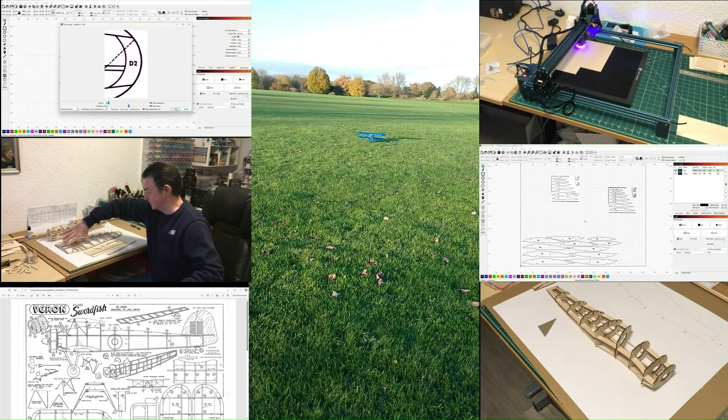Okay, so first of all, if we go to Outerzone, in order to get our plan, in the search I'm going to put DLG. And then when we search, we find there's only one Discus Launch Glider in here. So if we select that, go to the plan details, there's a nice picture of the airplane there and a bit of an overview of the plan.

So what we can do then is, by just clicking on the plan file, we'll download that. It'll go straight into our download, where we can then move it either to our desktop or into whatever folder you're using for this build. Okay, so this is a copy of the plan.

Now this is a modern vector plan, so everything will just work in Lightburn. It'll already be Lightburn friendly. We won't have to do anything with these components.

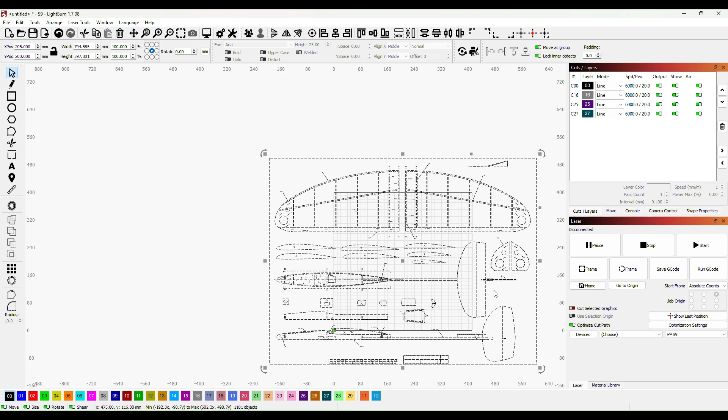So what we'll do is we'll open Lightburn, and then I'll import that file, DLG. This is where I've got it, so double click on that, and now that is imported into Lightburn. So all I'm going to do is move the plan across so it's sat next to my workspace. This is the workspace for the laser, the Sculptfun S9.

Now what you'll notice is that for whatever reason, and I don't know what the reason is, the Lightburn program has not brought the notes with it. So the arrows are there, but if you look at the original plan, you can see there's notes here.

So for example, this here is carbon fibre tube spar. So that means we're going to have to get some carbon fibre tube. And I think also I might look at this leading edge here. It's saying that it's made out of 1/8 dowel, which would be 3.2mm dowel. But I might look at using carbon fibre there, which will mean that I'll have to cut in these wing tips so that we can sink the carbon fibre tube in without having to taper the end. So we'll have a look at that when we come to assembly and see how we get on with that.

Now, if we go to Lightburn, what we find is these components, they're already made up as vector files, so we'll be able to use them as drawings that are ready to cut. The problem that I've got with them though is, obviously we need to remove this trailing edge from these ribs.

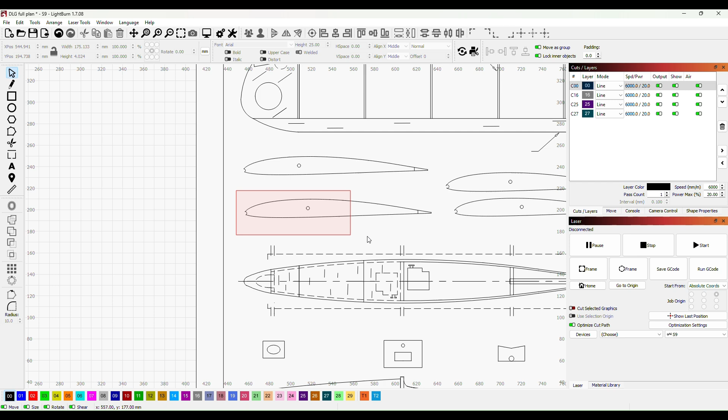But if I take hold of a piece of this rib and move it, you see that it's made up out of small bits of line and such. So what I'm going to do is just Control Z, Control Z to get all them back to where they were.

What I'll do is, I think the best way for us to go about this is to bring that across, and then if we go to nodes, we can click on this part of the top of that rib, and if we hover over this point here, we can insert a node just like that, and then we can delete those nodes by highlighting them and pressing D.

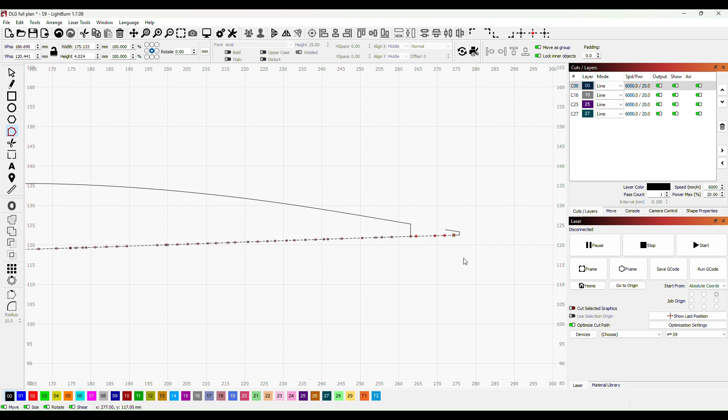And then on this bottom edge, if we hover right over this point and press I to insert a node, then we can select these nodes and press D to delete those. Then if we come off nodes, we can select this bit back here, get rid of that.

And now what we've got is we've got the rib ready to sit straight onto our trailing edge. So if we group that, that would in effect be that rib completed.

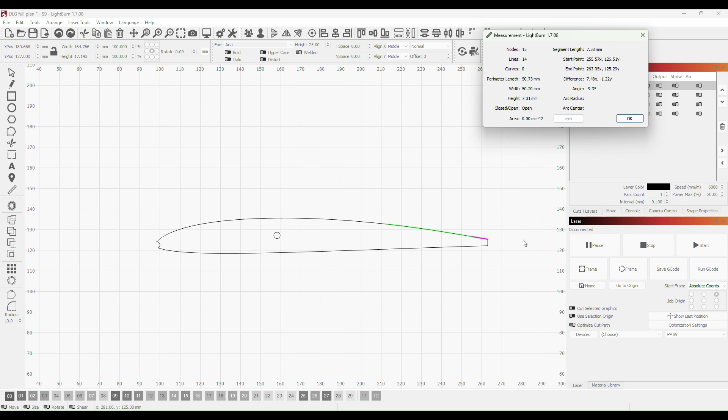But there's just one thing I'd like to check, and that is the height of this point here. That's saying it's 3.15, so that'll fit nicely onto a piece of 1/8 trailing edge. So that's absolutely fine.

Okay, so if we just go back to our original drawing, we can see that that rib that we've just copied is W2. So I'm going to label that up W2.

Just bring that down to, I don't know, maybe 4mm. We'll call that W2, and we will assign that our layer 01, which we will set up when we come to do that. We'll set it up as our engraving layer, and 00 will be our cutting layer.

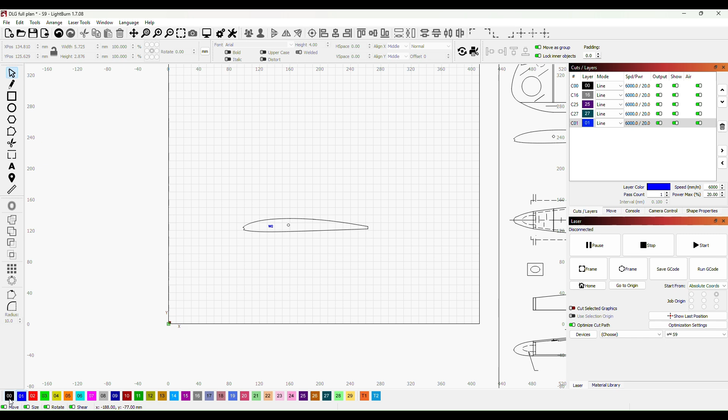So just group again to make sure that our letter stays with us. And there we have our first rib done. Now bear in mind there's going to be one on this side and then one on the other side.

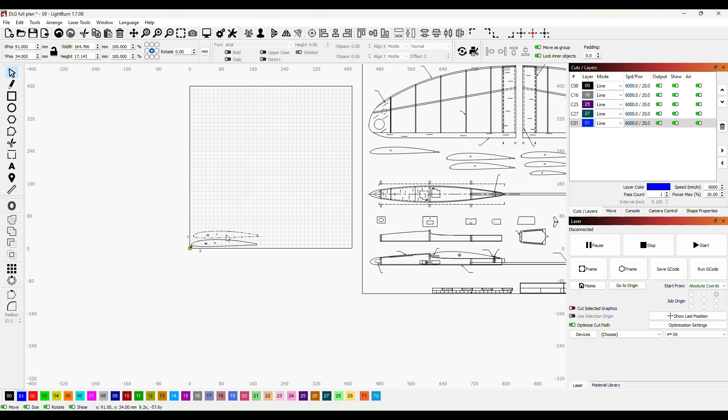So we need to do a quick copy and then a quick Control V, so we've got two of those. And before we stop, what we'll do is we'll just put our tabs in there.

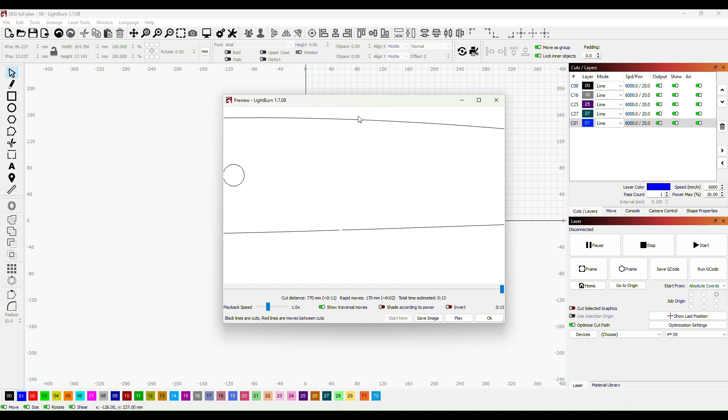Should have really done this before I copied and pasted, or before I copied the rib. And then what those tabs will do, if we just go to preview and we zoom in, you can see there's a little gap there of 0.5mm, top and bottom. And all that'll do is mean that when we come to cut these components out, they won't fall out of the balsa wood.

Okay, so that's W2. So what I'll do is I will just copy each of these in exactly the same way. I'll show you what those ribs look like once they're all done.

Well, that's an interesting thing. I've now created W1 in exactly the same way as I created W2, and what I'm looking at here is it looks like W1 on this drawing is shorter than W2.

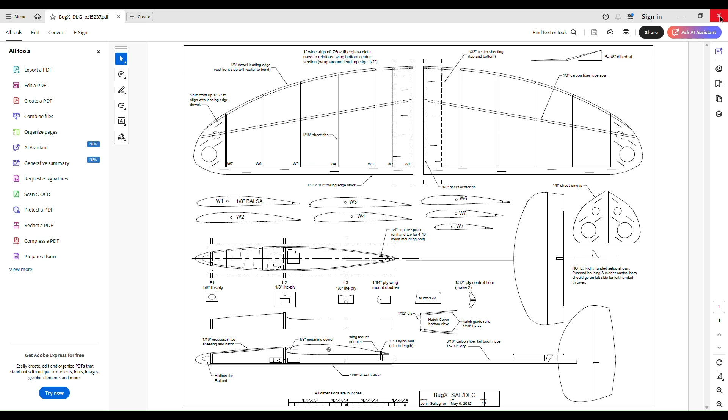So if we go back to the original PDF here, yeah, you can see there, W1 is actually shorter than W2, which is a little bit strange. It's obviously inaccurate. Let's just check that now on the wing itself.

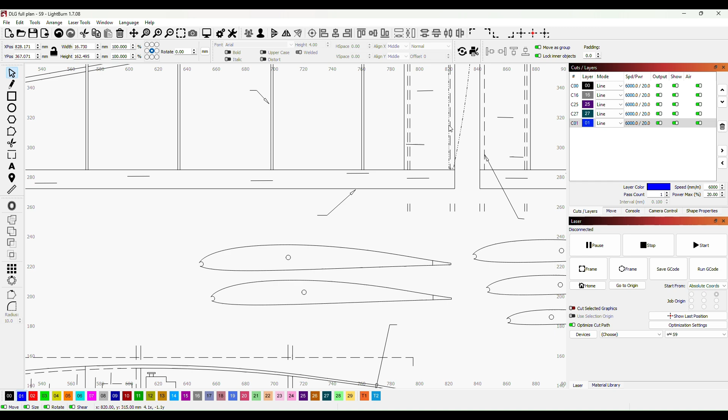So if we take W1 and we bring it up to where it should sit on the wing plan, if we just bring this down so that the bottom of the rib is actually on the trailing edge, when we come up here and we look, although we're a little bit out there, we can see this rib is going to be too short.

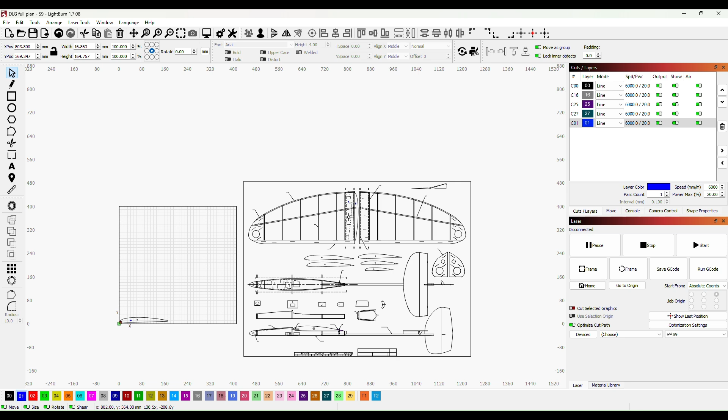So let's bring the other one over, W2, and if we put that onto the plan, just bring the bottom of that wing tip, that rib up. So I'll just use Shift and Control and my arrow keys to just get that line exactly right there.

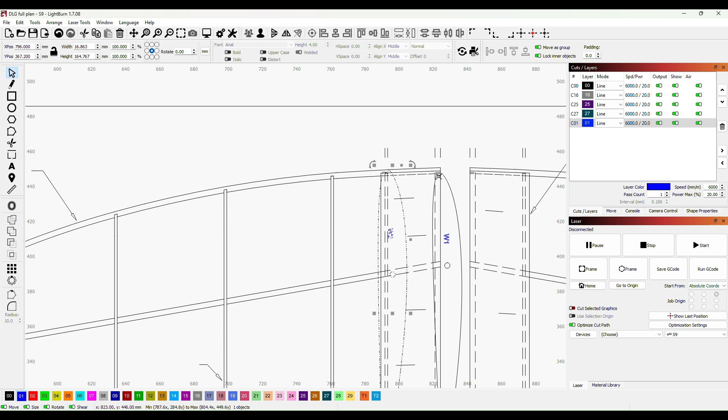And if we go up to the top, we find that rib is considerably too long. So this wing would actually be going upwards there instead of, or the slope of the leading edge would be incorrect.

So what we'll have to do is go about this in a slightly different way, which is a little bit disappointing because you would sort of rely on the accuracy of these plans. But never mind. Let's work out how we're going to deal with it.

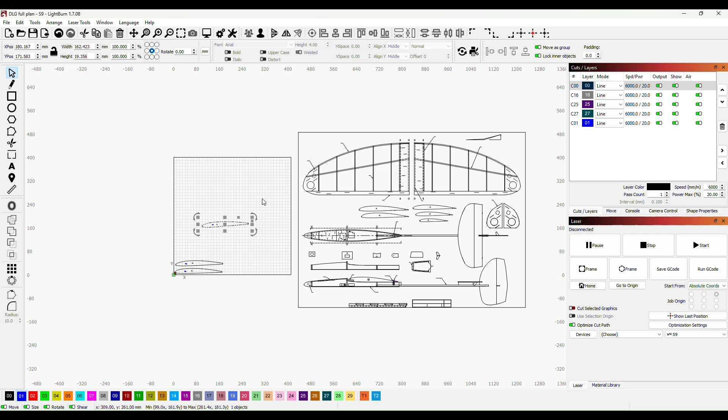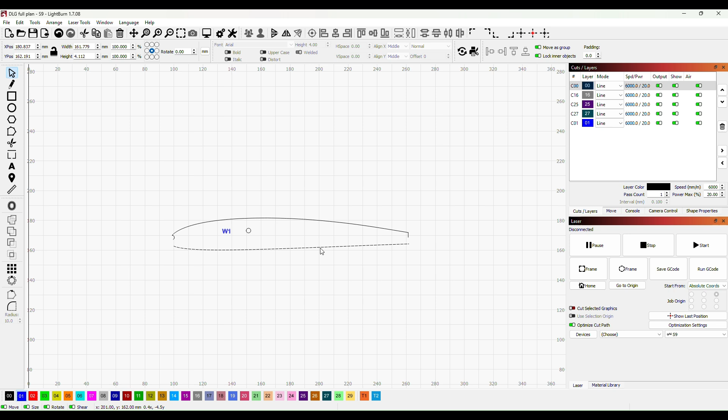And my thoughts on the matter are—whoops, Control Z—my thoughts on the matter are, we've now got W1. So what I think we should do is ungroup. Unfortunately, we have to do that twice because we've grouped it twice. Just make sure that's all ungrouped. Yep, it is. So Control Z.

What I think we need to do is we'll remove our—let's just move that out of the way for now. And then what we'll do is we will group the outer line, and we'll bring that over, and all I'm going to do is put that in position on the plan. So I'm going to scroll right in and make sure that I'm absolutely bang on. There we go.

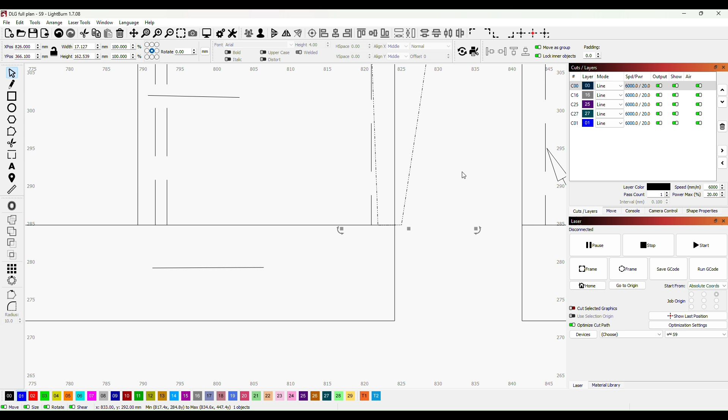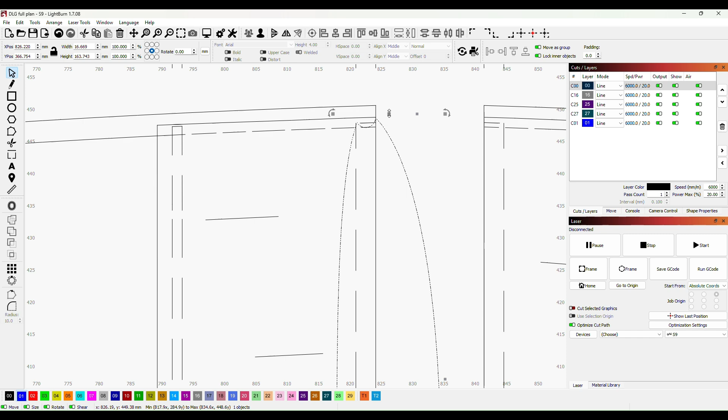And then I'm going to come to the top, and all I'm going to do is first of all correct the angle a little. I'm just going to drag that up until this part of the rounded bird's mouth is touching the bottom edge of our dowel, or of what will be our dowel. Just like that. I think now that is the correct height.

Our carbon fibre tube is slightly above centre. It's around the centre of this section here. So what I'm going to do is just measure that section just there, and that is 16 millimeters, or maybe 16.6 millimeters. So I want that to be 8 millimeters from the bottom, the center of that hole.

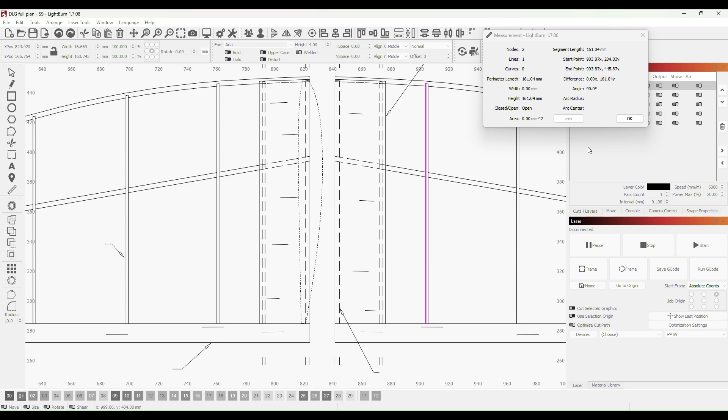So if I just move the whole thing over, just move the whole thing over until we are in the center, and we can check that with our ruler. Just go from there to there, and that is now 8.6, so we want to move 3/10 of a millimeter over. So if I press Control and Shift 2, 3, there we are.

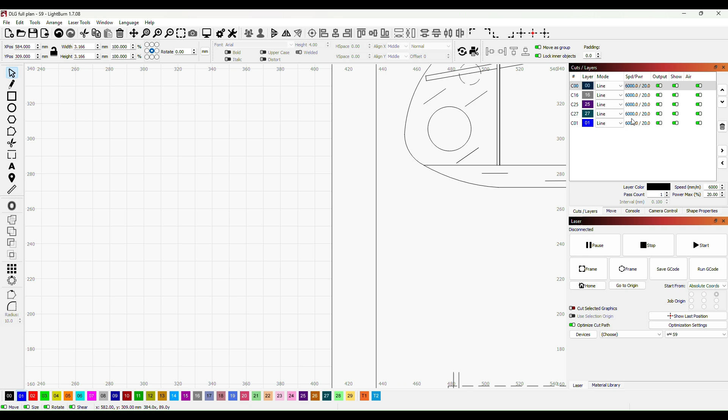I can now come back and grab our 3mm circle, and I can put that right on our spar there, and I know now that that spar will line up with that hole.

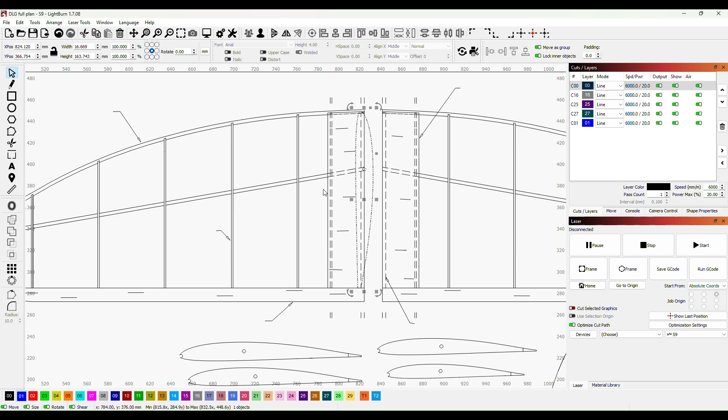So if I press Control, that's already selected. I'll press Control, I'll select the outer edge as well, and then I can group those, and I can bring that component back, and I now know that that is the correct size.

And unfortunately we're going to have to do that with each of these ribs. So that is W1, W1, and I will now group that, and I'll put my tabs in just like that, and then I will Control C, copy, Control V, so I've now got the two W1s.

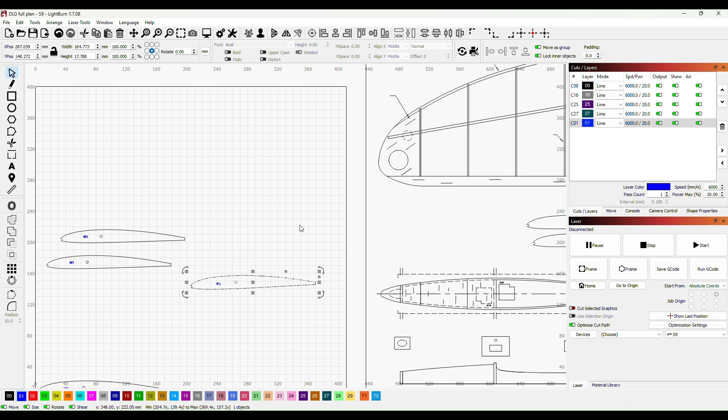So what I'll do now is I'll do exactly the same with W2, and I'll do that so that we can all see it, and then I'll carry out that process with all of the other wing ribs, just to make sure that they're all the correct size.

So just ungroup, and unfortunately we have to ungroup again because I grouped twice earlier. We can delete W2, and we can just grab our little disc there, our little circle, and move it over to there.

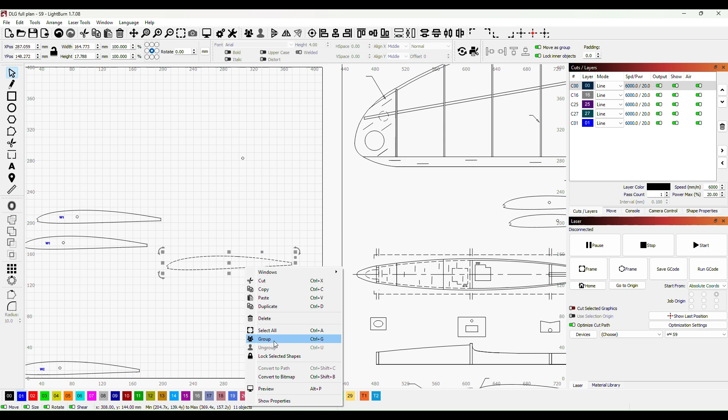I can then group this and bring it over to where we want it to be. This one's going to be W2, and it's going to sit right there.

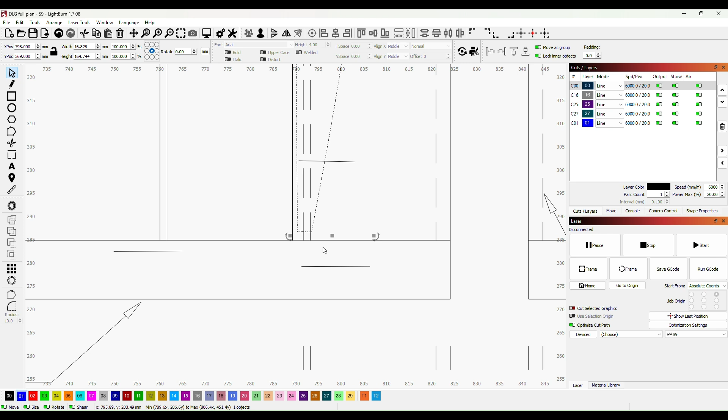Okay, so I just zoom right in, and then using Control and Shift, and then the down arrow, I'm going to just bring that down. Just turn that a little. There we go.

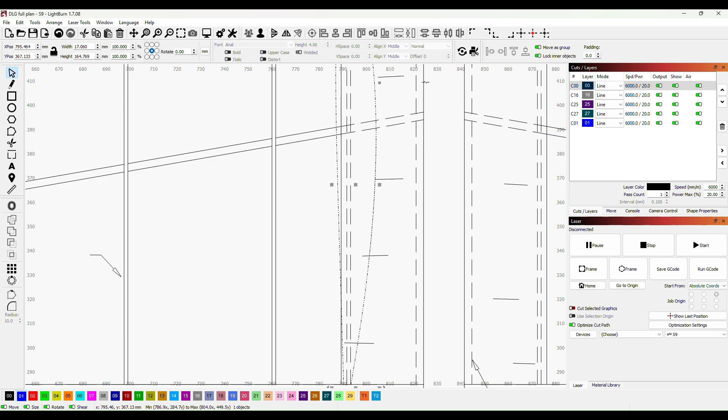Just move over so we're in the right place, and then I can come up to the top, and I just want to move it down until this bottom of this bird's mouth is just level with the bottom of the line of this leading edge, just like that. There you go. That is now perfect.

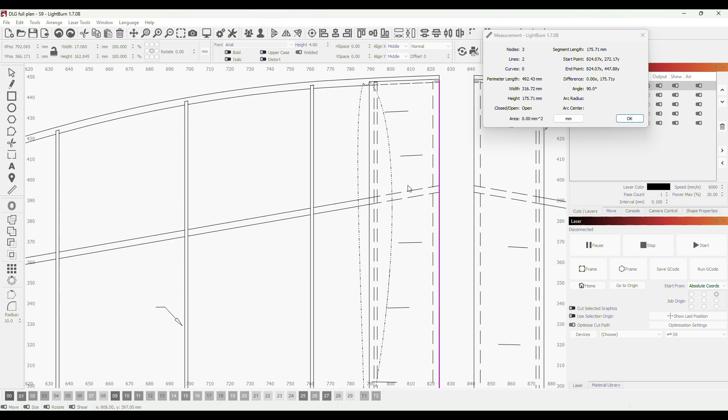Now that looks like we are right in the middle there, so I can bring back the 3mm circle, and then I can position that using my arrows.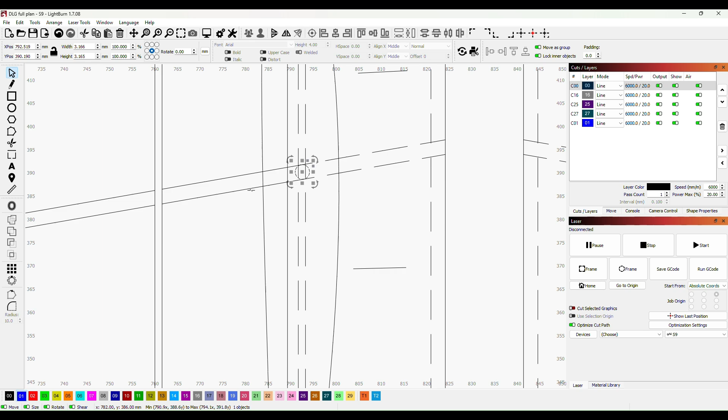And I'm confident that that will be exactly in line with this spar now. Okay, so I press Control and I select the rib itself, and then I can group, and we now have W2.

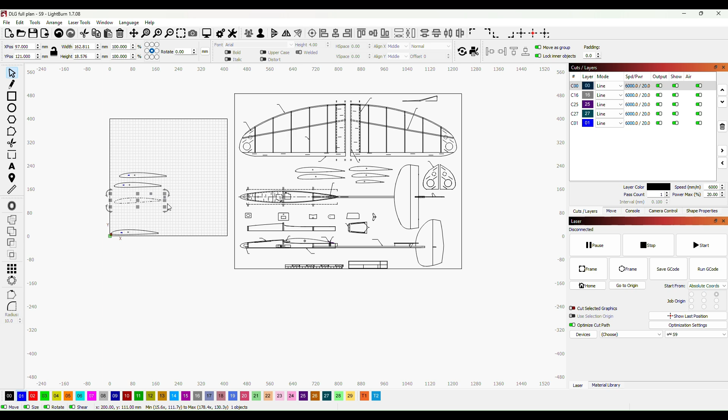It's just a little bit disappointing that we're having to do this, because I would have expected the plan to have been, you know, spot on, but never mind.

So W2, and then if we group those again, I can then Control C, Control V, and I've now got a copy of W2. So I've got both of those ribs now done.

So I'm going to have to do that and do the check, the size check on each one of them, and then reposition the hole for the spar. I'm going to have to do that with each of them. So what I'll do is I'll just get on with that, and then I'll bring you back and show you what they look like in just a minute once I've gone through that process.

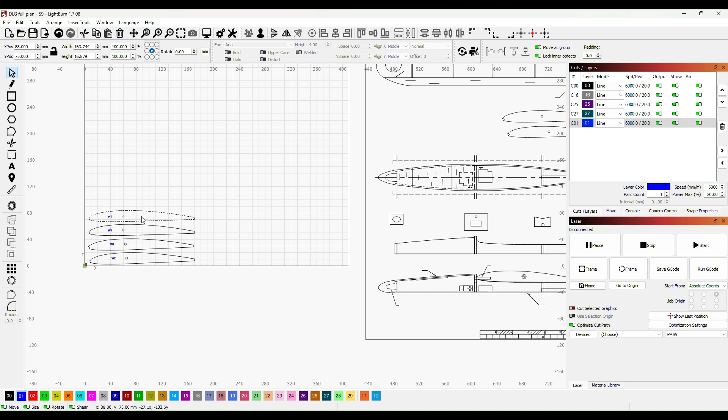Okay, so I've completed that process now, and I've got all of the wing ribs made up in pairs. So that's all the wing ribs done. Next I'm going to look at the wing tips.

Now what it says on the original plan, the wing tips are 1/8 sheet wing tip. Now when we look at the rib that meets the wing tip, when we measure that, the depth is 8.9 millimeters. We're not quite upright with that line, but it's over 8 millimeters anyway.

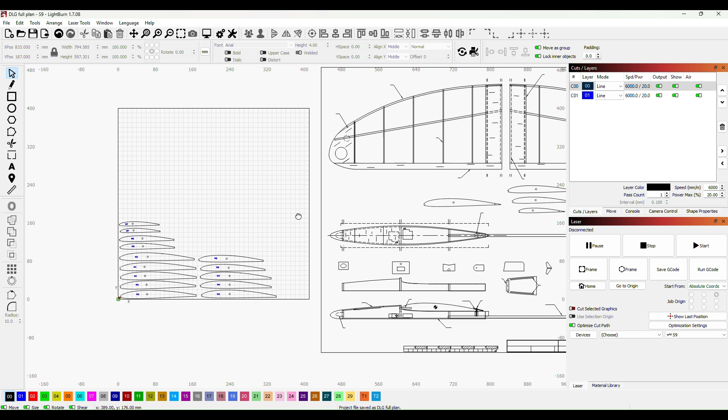So what I'm thinking is we really need to have a laminated wing tip where we've got probably 3 pieces of material, and then we'll have to sand that down first of all to fit the profile of the last rib, and then sand it down to a fine edge at the wingtip.

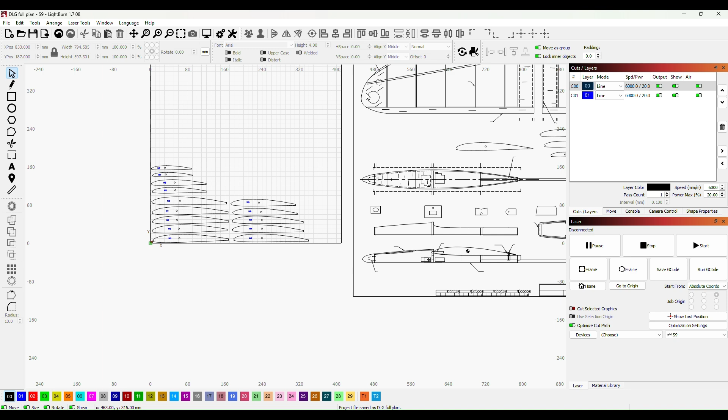And the reason I think we should do that is to accommodate the carbon fibre tube that runs through the centre of all of the ribs, because if the middle laminate sheet, if we make 3 pieces of this balsa wingtip, the middle one can have a slot cut into it to accommodate this pole.

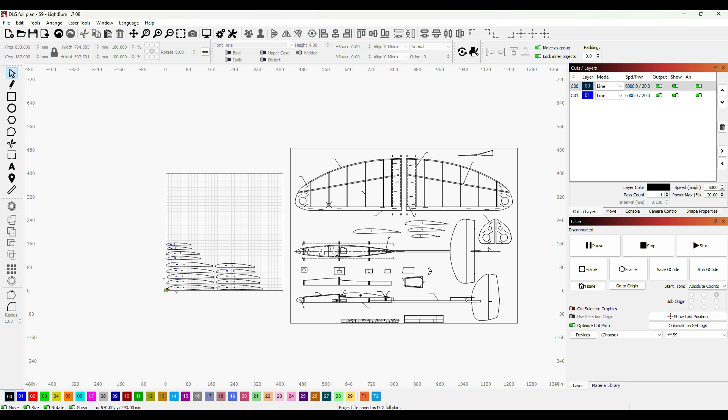And then when we drill through the wingtip to put our launching peg, I think that will probably be a better way of doing it than having a single tip with the spar glued on top of it. Okay, so that's what I'm thinking we do with that.

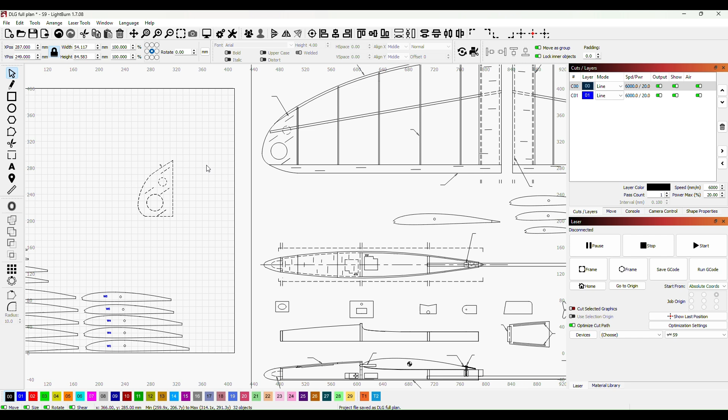So if I just take one of these wing tips across, I'll just check that for size. Yeah, that looks about right on there. So if I bring this across, let me just have a little look what we got here. Yeah, it's like the other one, it's all in separate pieces.

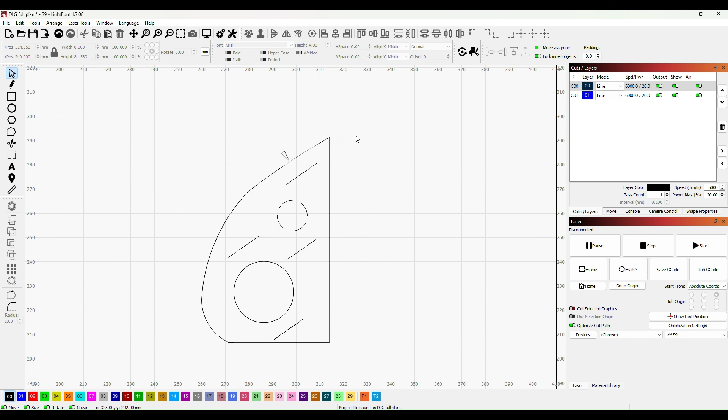So if I Control Z, I think the best way to deal with this one is, instead of grouping this and manipulating it as a group of separate components, I'm going to just trace the outline. I'm going to reshape the outline with lines and nodes, so that we don't have any difficulties as we go forward.

So I'll just change the layer so that I can see the line against our shape. So I just position on this corner and bring that down to there, and then we've got a straight piece there, and then into our curve.

And all I'm doing is clicking on that in a number of places to create nodes, which will then later change to smooth curve nodes. And this piece here seems, oh no, it's not quite flat.

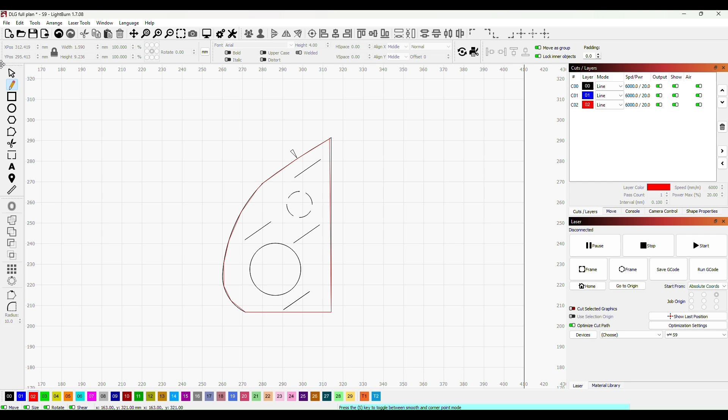Okay, so we'll go to nodes, and the first thing we need to do is get onto the corner here, which I missed by a mile. Okay, so that straight edge there is nice now.

So if we go to each of these nodes, and then we convert them into smooth curve nodes by clicking on and then pressing S.

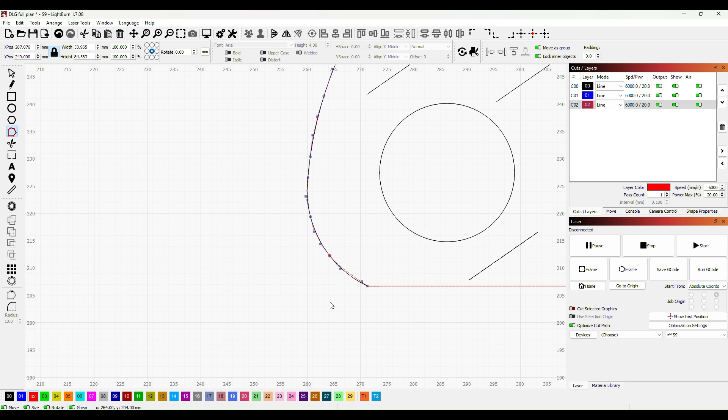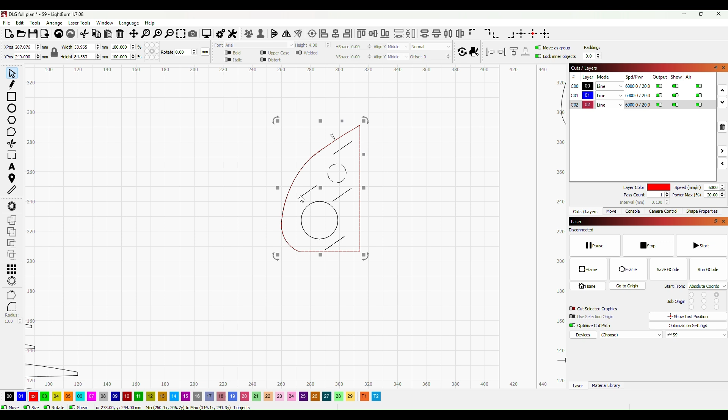And then what we find is, I think we'll have quite a nice shape there. Just bring this one out a little. Perfect. Okay. So if we come off there, that is now more or less the shape of our wingtip. Quite happy with that.

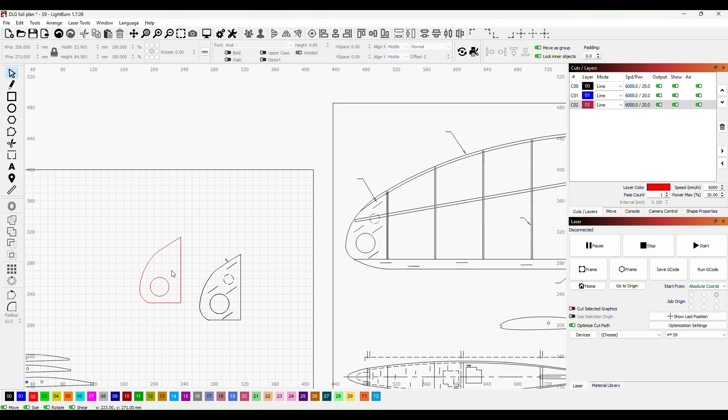So we'll just put this circle in. There we go. So for the time being, I'm going to group these two by first clicking on that one, then press Control, click on this one, and then I can group, and when I bring that away it will have its hole to reduce the weight already built in.

Okay, so the last thing I need to do in order to complete the wing is make the components which will laminate this end so that we can shape it to the same size, or the same profile, as that last rib.

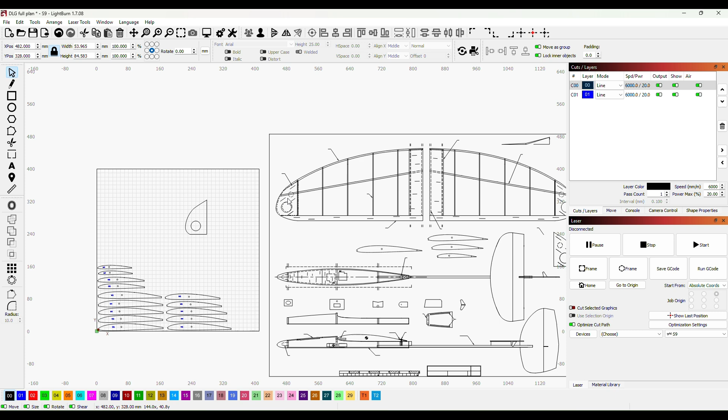So what I'm going to do is just Control C and then Control V, make a copy, and that copy, what I'm going to do with that is cut a slot in it so that we can put this central spar into the middle section of our laminate.

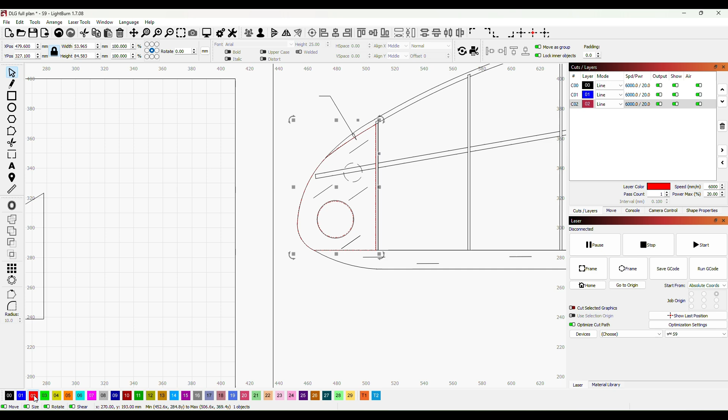So I'll just position that perfectly using Control, Shift and the arrow keys, and that's where we need to be. Now if I just change the colour of that so we can see it, I've changed it to red.

I'll just ungroup this, and then go to nodes. All I need to do is hover over here, click I, and insert a node, then exactly the same just there.

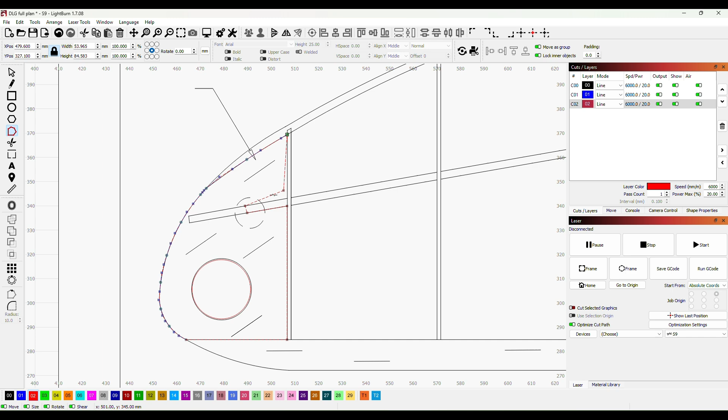Insert a node, and then somewhere in the middle we can insert another node. They jumped to where that other node was, so if I just delete that one by highlighting it and press D, I can bring this one back to where it should be.

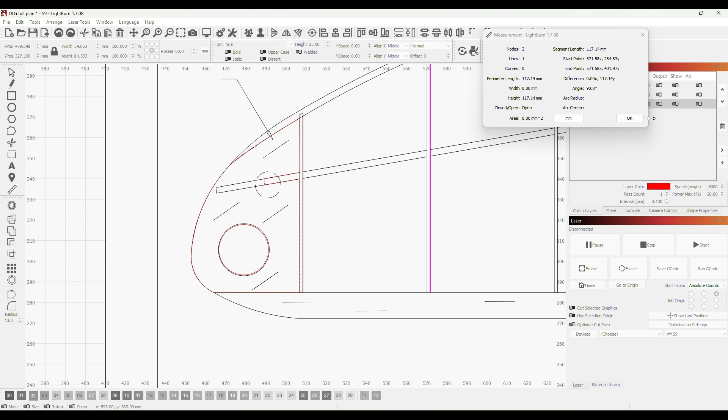Now all I want to do is bring this in part way into the wingtip. I don't want to go as far as this, because otherwise when we taper down the wingtip on the outsides it'll expose the carbon tube. So if I make it around that size, it will be inside the wingtip by nearly 20 millimeters, 19.36 millimeters, and that will be plenty for it to be sandwiched in.

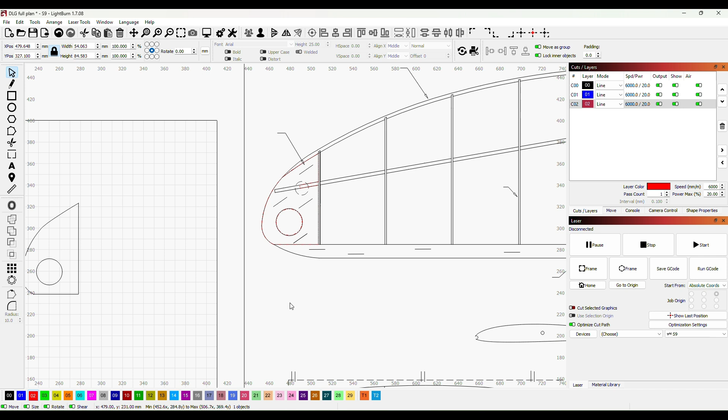So if I now select that, and then Control select the circle again, we can group. And what I've got now is the center part of our laminate that I'm going to make this wingtip out of.

So what I want to do with this one here is make this come beyond to the very leading edge, and then we'll be filing that, or sanding that down.

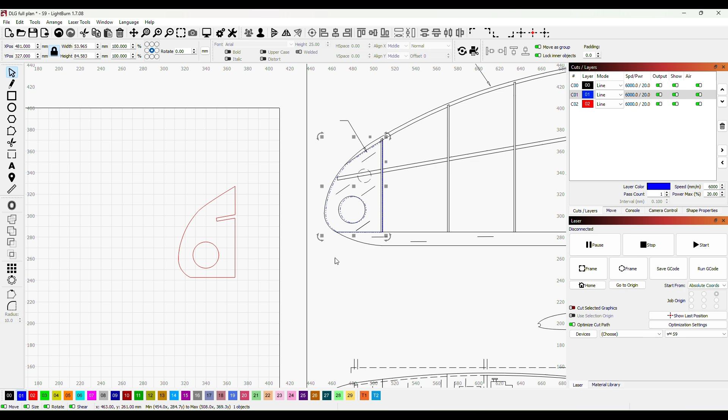So if I bring that over and put that back in place just the same as the other one, I'll just change it to a different colour, and then we'll move it into place using Control Shift and the arrow keys.

As such, and then what I want to do is ungroup, and then go to nodes. If I grab all of those nodes and just Control Shift and bring them all up till they're in the center, that means our...

the outer part of our laminate will now go over the center of the leading edge, so I'll be able to sand them down and it'll come to a smooth taper, and then it'll go round the leading edge. And of course the leading edge will sit inside on the front of this centerpiece here. So I'll show you how all that fits together when we come to do assembly.

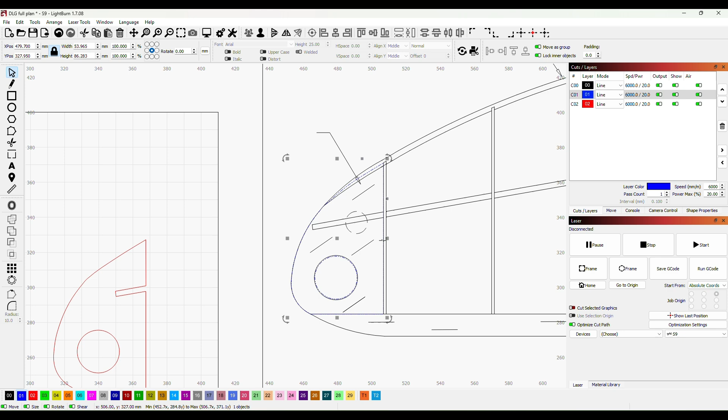But what I want to do now is group our components again, and then bring them over. Now what I've got is my two outer leaves and the center leaf, if I copy and paste.

Now what I'll be doing is the top part of the wingtip will be in 1/8 balsa, or 3.2 millimeters. The center part will be 3.2 millimeters and the bottom part will be 1.6 millimeters, and that will bring us up to the right thickness to be able to match this end wingtip.

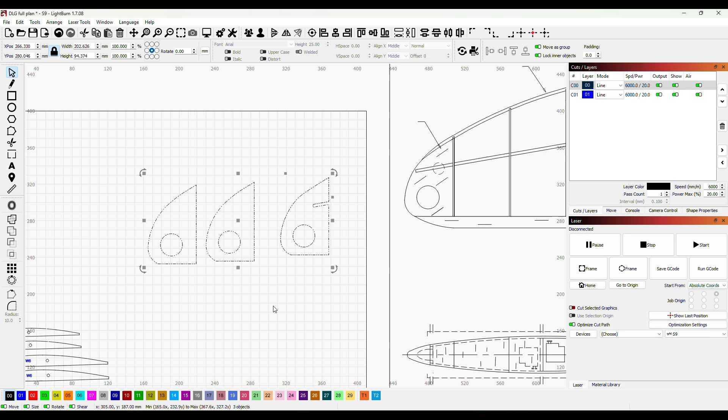So all I need to do with these is convert them all to the cutting layer, and then produce a copy of all of those, bring that here and Control V. Then what I want to do with those is, using our mirror function up here, just flip those round.

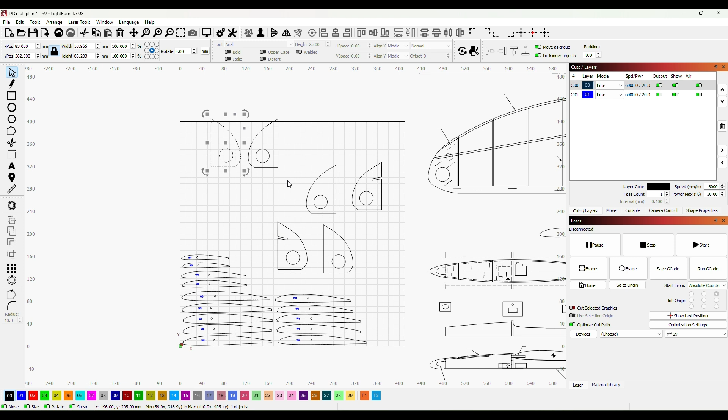Then I need to take one or two of these, and they'll be our 1/16 material, so they'll go onto a different cutting sheet. And these four here, I will find a place for them now on our 1/8 cutting sheet, and we'll be able to send the wing components all off to the laser.

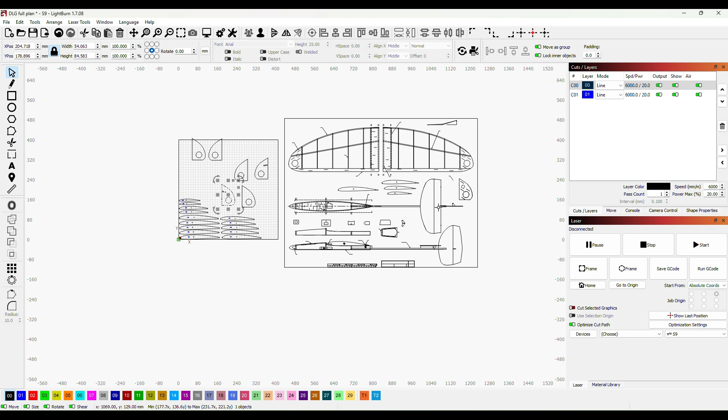So that's all I'm going to do for this video. What I'm going to do in the next video is produce all the components for the main body and the vertical stabilizer and the horizontal stabilizer, and once they're all laid out on sheets, I'll send them to the laser, and that will be in the next video.